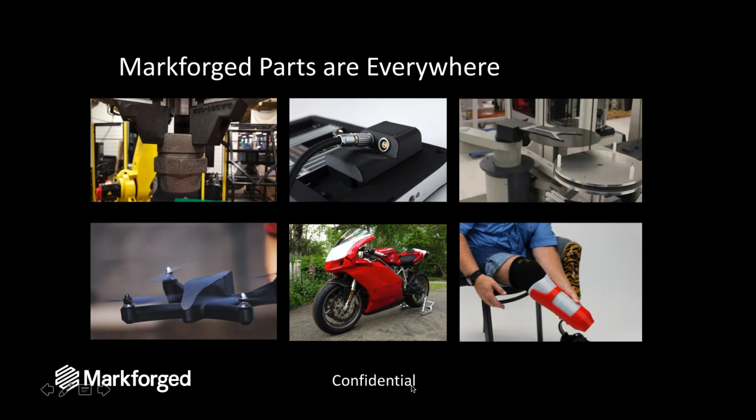All right. Okay, great. So thank you, Cynthia.

And so now we'll move on to sort of an overview of design for manufacturing. So in general, in sort of a design workflow, whether you're an engineer or a designer, the usual process: you come up with that idea, you model it in your CAD program, you draw it up, then you go to your manufacturing and design process, and then you have your final product.

And this is sort of an ideal workflow that doesn't really have a lot of the hidden factors in designing for the manufacturing process and iterating upon your ideas. So in reality, there's this sort of feedback loop: you come up with your idea, you start to sketch it out, you start to draw it, you start to model it, and then there's this cycle of iteration and improvement in which you're designing to improve your manufacturing process, to improve the functionality of your product.

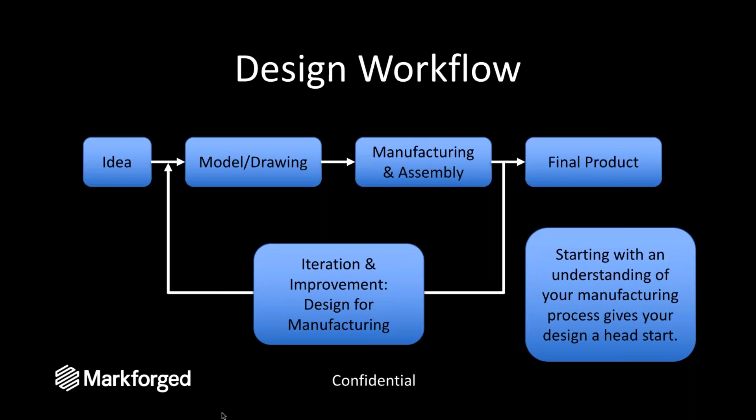And what a lot of engineers and designers do is start with a rough model before deciding upon a manufacturing process. And through iteration and improvement, V2 is always going to be a little bit better designed for a specific manufacturing process than V1. And every step of the way, there's always room to improve the design of a model, because there's always ways to make the manufacturing of that part easier. Whether it's a CNC machine, a 3D printer, a laser cutter, design for manufacturing ensures essentially that you get reliable parts that can be produced easily.

So why design for manufacturing is important is, on the evaluation side, you can save a lot of money through implementing effective design for manufacturing. So a part that you machine on a mill, your first revision of it may take 5 hours to machine, but your second, because you were able to eliminate a tool holding change, could take 3 hours, and that saves manufacturing time, which saves cost, which increases efficiency and decreases time wasted. So in every manufacturing process, there's always ways to evaluate how to make your design more effective.

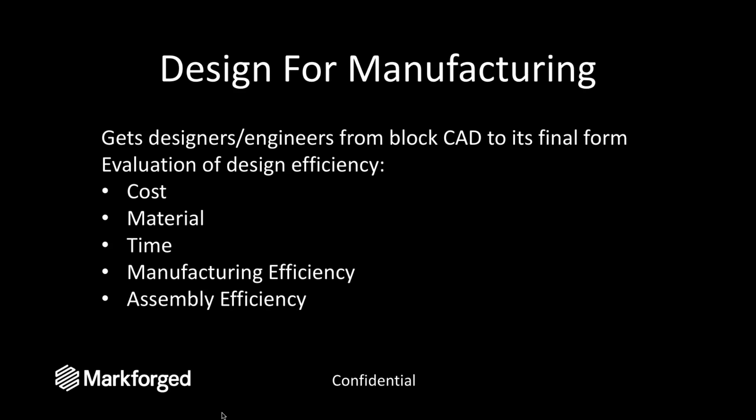One example that I always like to talk about is hand drills. The shell of the hand drill is this complex injection molded part, but the way that it's designed means that an entire hand drill, if you take like a DeWalt drill or something like that, can actually be assembled in under 2 minutes. So the part is very well designed for assembly, because they want to produce thousands of these a day. So everywhere in the design process, you can really increase your productivity and design efficiency by critically considering your manufacturing process and what its benefits and drawbacks are.

So for example, we start with a block rough CAD model of an enclosure on the left here. This enclosure, depending upon what manufacturing process you decide, can be optimized to suit the efficiencies of that manufacturing system. So for example, on the bottom, if it were to be laser cut, you'd have to split it up into a bunch of flat pieces that you would then glue together or bolt together and use maybe standoffs or spacers to get the threads where you need them to be.

And this would be very different from 3D printing that part, which would probably take longer than laser cutting to manufacture, but give you a higher quality, more final looking model. You'd need to have heat set inserts for the threads that you see in the model, and you would design it to have a little bit more natural and curved aesthetic.

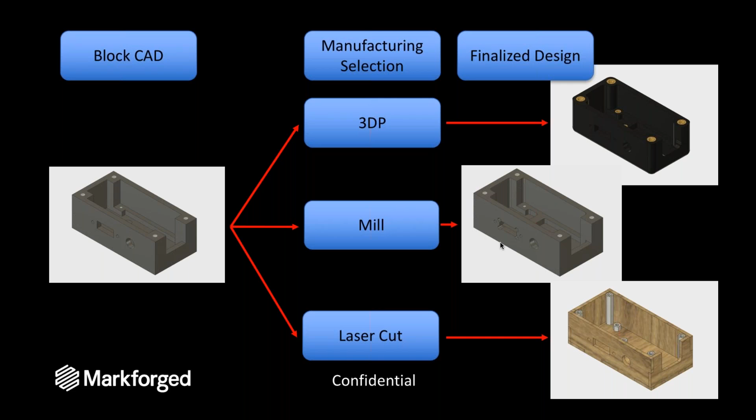Whereas if it were machined, you'd probably have to do some amount of design work to optimize for what type of bits you're using, what stock you're cutting from, how you plan to hold that stock, and how you plan to deal with things like if you need a sharp corner when you're machining something, how you go about doing that because the bit is often round. So every process requires this step of making sure that you can actually manufacture it given the manufacturing process you've selected.

A lot of the way that 3D printing is portrayed is as this tool that can create anything. And our thoughts on that are that 3D printing is just like any other manufacturing process. It has some really amazing benefits, especially with our printers. You get parts that are nearly as strong as metal. You get parts that are very precise, very high quality surface finish. But designing with the process in mind is still a really, really important step because it will guarantee quality and reliability in the parts that you're printing.

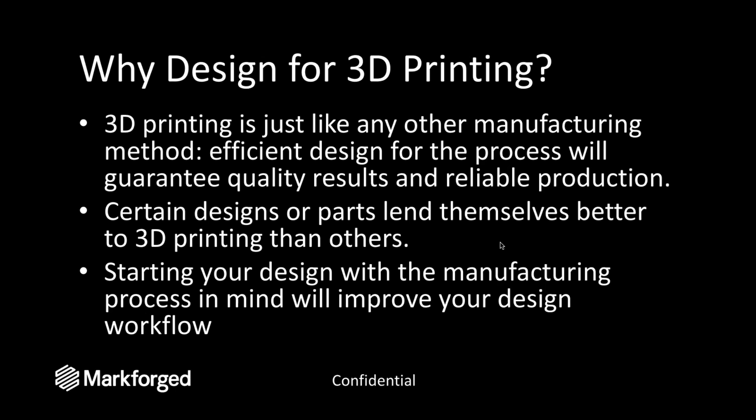So if you start your design with the idea that you're going to be 3D printing it or you're going to be making it out of sheet metal, that will be able to improve your design workflow. And in order to do that effectively, have a good understanding of what the limitations and what the pros and cons are of the 3D printing process as a whole. So we're going to go through some of those pretty quickly just so that you have an understanding of where 3D printing can be really valuable and where other manufacturing processes may be better.

So in terms of our type of 3D printing, FFF 3D printing, so fused filament fabrication, the process is layer by layer. So you're laying down sort of beads of material on a build plate, building that up layer by layer. So where the design for manufacturing for 3D printing on any sort of FFF 3D printer comes into play is in the geometry limitations of this process.

So that includes the support and overhang angles. That's based on material. That's based on sort of how supports are generated. The z-axis strength of the material itself. So how can you orient your part to be stronger, to be strong where you need it to be strong?

3D printing in general is a relatively slow process compared to things like laser cutting, but ends up being much faster when it comes to things like using a service provider to order CNC machined parts from. So a lot of these specifications are dependent upon the printer, but in general, the additive layer by layer process has geometry limitations.

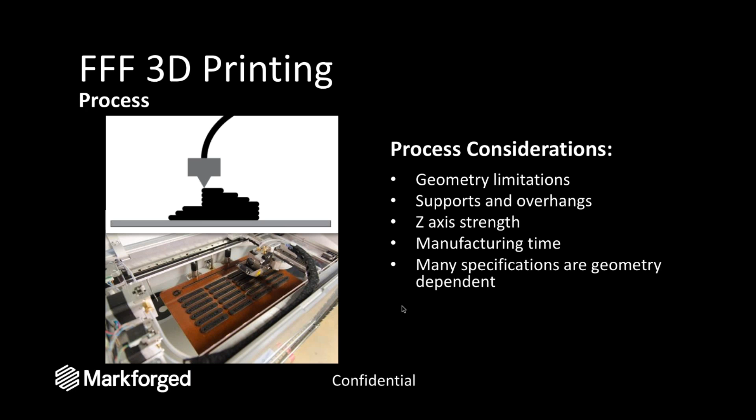And so you can optimize for that, you can control how much fiber you're putting into your parts, and so that's what makes our printer stand out. The part strength ends up being comparable to metal because we're able to lay down continuous strands of fiber inside of our parts. Some of the considerations are, because the fiber is being put down inside of parts, small feature reinforcement has its limits, just like the small feature capability of any sort of 3D printer.

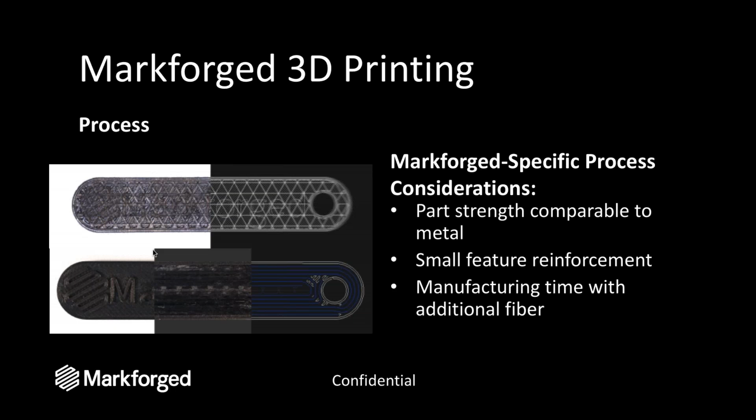So one of the big geometry considerations of 3D printing in general is the minimum wall thickness and detail that printers can hit. So on our printers, we can hit about 1.6 millimeter wall thickness; that's the thinnest feature we recommend including in designs. So basically why that is, each strand of filament is 0.4 millimeters thick. So when you get down to really, really small wall thicknesses, you want to have at least 4 walls. So that means at least 4 strands of filament.

For detail features like engravings and embossings on your parts, the filament can sort of extrude outwards and then come back into the part. And so we generally suggest 0.8 millimeter thickness for details that are on the faces of different parts.

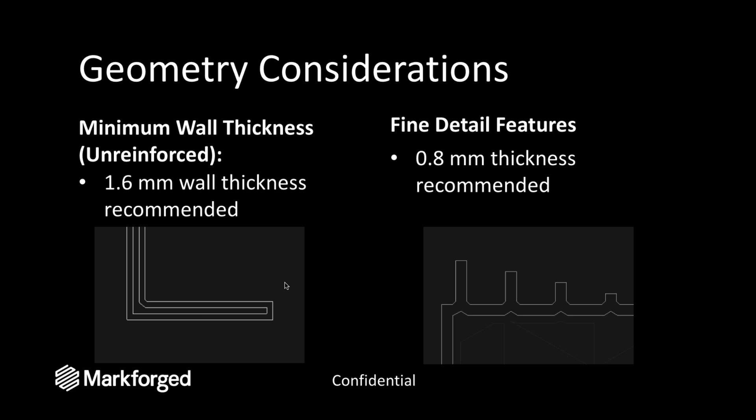These screenshots are all from our Eiger software. It's how we slice our parts for printing. So you have control over infill settings, the slicing settings, etc. And then you also can control on a layer by layer basis how fiber is reinforcing your part, and we have settings that we optimize for that.

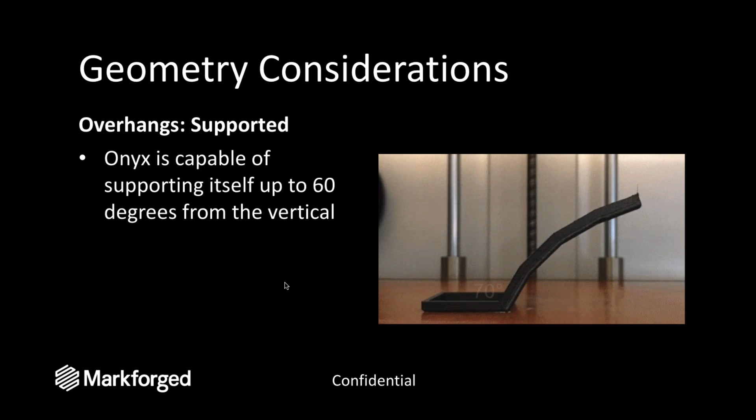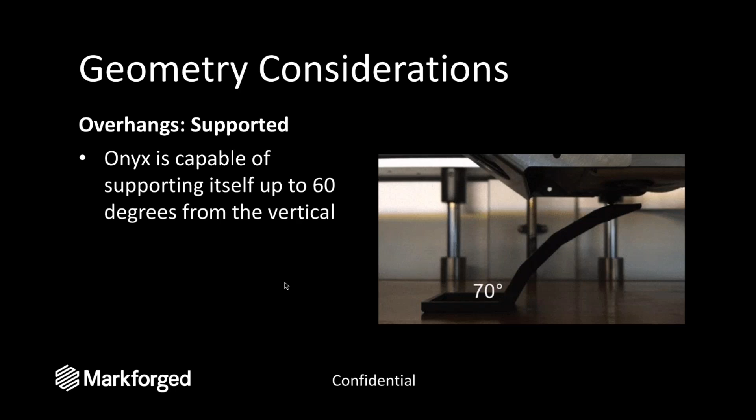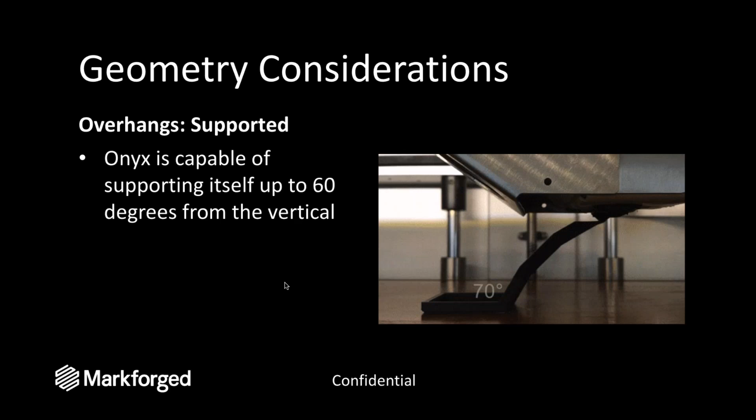So in general, overhangs are another big design consideration in 3D printing. Our Onyx material is capable of supporting itself up to 60 degrees from the vertical. So our supports usually kick in at around 45 degrees, but usually we're able to do a little bit more than that. The overhangs end up being really important because if you want to cut down on material usage and print time, then you can use the overhang angle to your advantage when you're designing to remove support materials, and I'll talk a little bit about that later.

In terms of the minimum detail feature size, vertical posts and minimum hole diameters are another key consideration. So we recommend about a 2 millimeter diameter minimum post size. This is for a similar reason as I explained before with the minimum wall thickness, where you need a certain amount of rings of filament being laid down to create the part. And for hole diameters, we suggest no smaller than 1 millimeter because the hole will essentially end up closing if it gets much smaller than that.

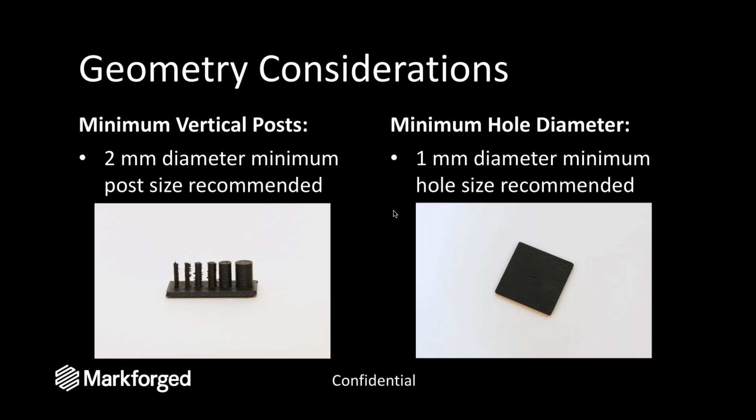A lot of these are very common to many FFF 3D printing processes because we're working with thermoplastics, and thermoplastics have their own set of requirements when it comes to how they behave when extruded.

Now we get on to the fiber reinforcement aspect of our printers. As we described earlier, our printing process has 2 nozzles. One of them extrudes the plastic, which I've talked about up until now. The other one lays down continuous strands of fiber inside of your part. So the fiber is always going to be reinforcing on the inside. Because it's being placed inside the walls of your part and you have some control over that on a layer by layer basis, it's always going to be trying to find a loop in your part.

So our general reinforced wall thickness minimum is 3.8 millimeters. There are exceptions to that. For example, on the right here, we're able to fit one strand of fiber inside of this loop extrusion because it can loop back in with the rest of the part. So if the feature is able to form a loop, then you can create a 2.9 millimeter wall. If not, then stick with 3.8 millimeters, and that will guarantee that fiber is able to fit into your part.

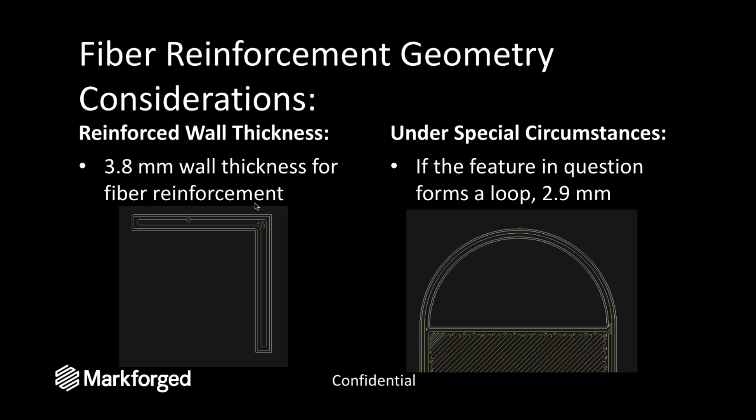An additional fiber consideration is that because we're laying down fiber inside of the parts, the fiber has a minimum required length. It has to be 45 millimeters or longer to be able to fit inside of your part. And so that means that for very, very small features, fiber may not be able to fit. And that's a big consideration in our printers.

A lot of our customers use our printers for things like tooling and fixtures, prosthetics, and equipment. And they're often printing these larger parts. And so the geometries that you can reinforce can only go so small because the fiber is continuous. So we need to be able to specify a length of strand that can fit into the part for it to work well.

In every layer of fiber, when you lay down a layer of fiber, the software creates roofs and floors over that layer. You can stack multiple layers of fiber on top of each other, but if you just had one layer of fiber, the minimum thickness of a part reinforced with fiber would require a certain number of floors and a certain number of ceilings on the top and bottom of that layer. So it's essentially a 9-layer minimum. With fiberglass, that creates a 0.9 millimeter minimum height. With carbon fiber, that's 1.125 because it's a little bit thicker.

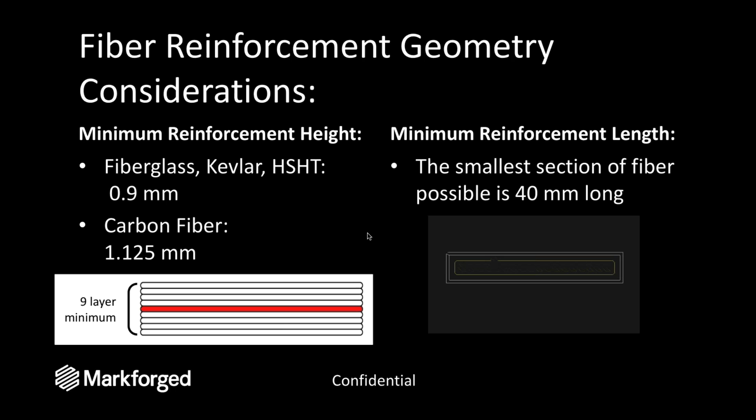And so as you increase, you can just fit a lot more fiber in, and so the roofs and floors end up taking a fraction of a percentage of the total number of layers. But in very small, very tightly packed parts, these are sort of the minimum details that you can hit with fiber.

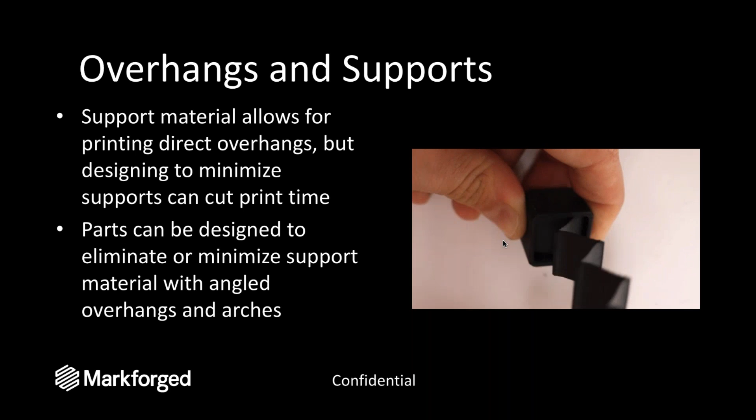Okay, so now we're going to go on to talking about overhangs and supports. So in general, our support material, as you can see here, you just sort of peel it out. It's this accordion-like structure that you can remove easily from the undersides of parts. It allows for printing direct overhangs, but designing to minimize supports is something that we often practice here because it allows you to cut down on print time, cut down on material usage, and that ends up saving a lot of time and saving a lot of money in some cases.

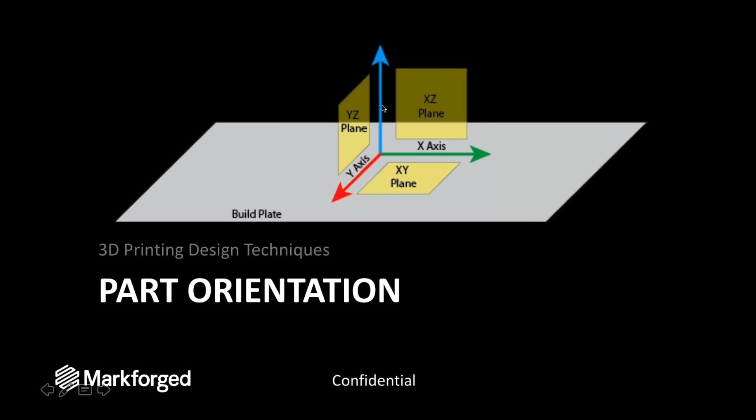This is how we consider our reference geometry, where the XY plane is parallel to the build plate. The XZ plane and YZ plane are perpendicular to that, and the Z-axis is normal to the build plate. So when you're loading along strands of fiber, where you're either trying to bend them or trying to pull them, that is where parts end up being strongest. This is both with normal plastic filament and also with fiber reinforcement, because that's where the fiber is really powerful. That's where the continuous strands are being loaded in the direction that they are meant to be loaded in. So the parts are strongest when the strength is parallel to the build plane.

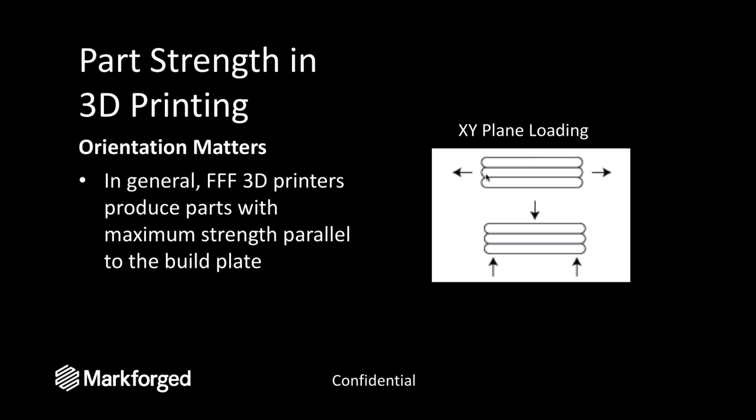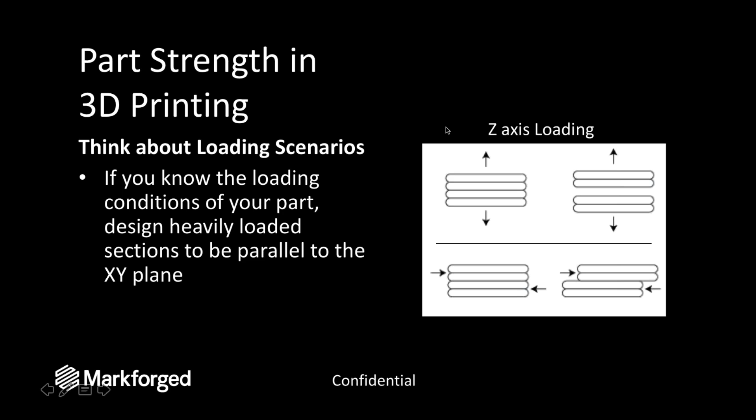If you know the loading conditions of your part, then you can design with that in mind. The Z-axis, on the other hand, in many 3D printers is what ends up being the weakest direction, because the layer adhesion is often going to be weaker than the tensile strength of the material itself. So it can often shear or pull apart. This is a drawback in many 3D printing processes, because you're always going to be building things up layer by layer. The Z-axis is going to be weaker than X and Y.

So with that in mind, designing with a build orientation in mind is a very powerful tool for designing parts for 3D printing effectively, because it allows you to reduce supports, reduce material, and reduce print time while optimizing your part for its necessary strength.

In terms of creating these types of parts and joining them together, as I discussed before, we have a lot of resources for that on our blog, and we'll continue to produce that. But when you're thinking about part geometries in 3D printing, really thinking about how your part's going to be loaded before hitting print can save you a lot of hassle, because there are always ways to make the design more efficient and more effective.

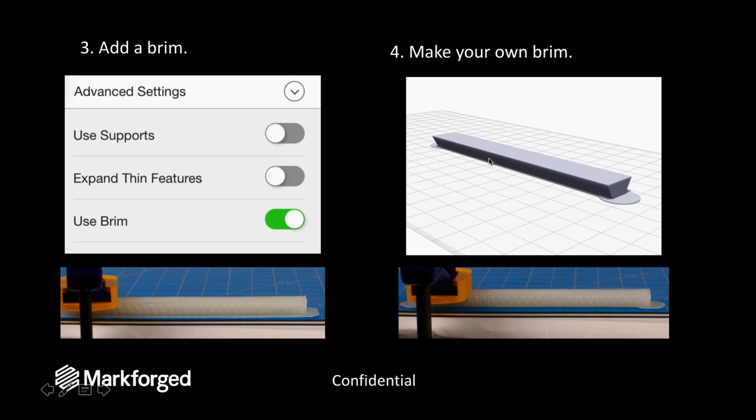In special circumstances where the brim may not be enough, or the brim may not have the geometry that you need to prevent the warping, you can make your own brim. So instead of adding a brim all around the part, I know that the warping just occurs at the ends here. So if I make larger cross-sectional faces that adhere to the build plate on either side of this part, then you can also reduce warping. So just by adding sort of these like Mickey Mouse ears to either side of the part, you can make your own brim and prevent warping.

So Onyx in general is very, very dimensionally stable. Onyx is a chopped carbon fiber nylon mixture. And essentially that micro carbon reinforcement, even though it's not continuous, means that the parts themselves are much more dimensionally stable and stay consistent instead of shrinking as much as other plastics like PLA, ABS, or things like that do. So I've had nearly no problems of warping with Onyx just because it's a very dimensionally stable material.

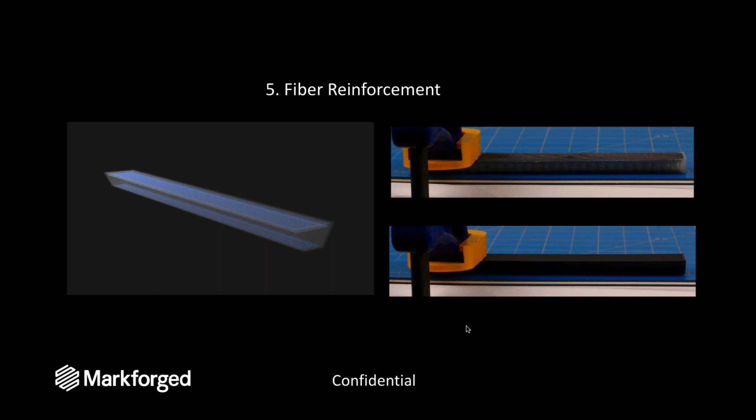So the next thing that we're going to talk about is tolerancing and unit tests. This is perhaps the most important lesson that I've sort of learned when working with 3D printing, because tolerancing in general for different types of machines is tricky. All manufacturing methods, and even down to specific individual machines, whether it's, if I have a CNC machine and someone at a different company has the same CNC machine, just because of even just the wear and tear on the machine, or what kinds of materials they're making on it. All manufacturing methods have their own tolerance specifications.

So 3D printing tolerances usually arise from gantry robustness, motor precision, and dimensional stability of the materials. So you may have noticed that on our printers we have a very robust, sturdy aluminum frame. With Onyx, our primary material, it's very dimensionally stable, as I just discussed, and we have high-quality stepper motors that control our gantry. So that means that we can usually achieve about 50 micron precision in a part.

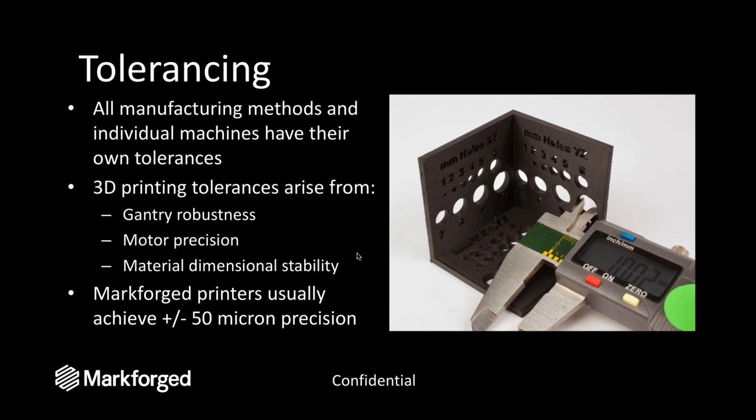So in tolerancing, especially if you're printing parts that are going to interface with other components, whether they're printed or not printed, tolerancing is really important, because you don't want to have to print a 16-hour print and then realize that it's wrong. So that's why we heavily suggest using what we call unit tests, where you're testing the specific fit of an interface without having to print the entire part.

So this part over here was designed by Daniel. It's the sort of lens hood for a camera. One of the very important features was making sure that that hood actually snapped onto the camera lens that he was using, and that fit was correct.

So the part itself takes about 4.5 hours, but he was able to test just the ring of that part, which was a 15-minute print, to ensure that the 4.5-hour one succeeded.

So unit tests end up being really important exactly for this reason, because especially in manufacturing, where expediency is key and hitting the right tolerances is key, you want to be able to make sure that the way that you've designed your part will work in context. So you can ensure that large prints will come out the way you want them.

When I first started 3D printing, I'd design a part, I'd print it out, I'd get really excited, put it on whatever machine I was making, and then realize that all of the holes were a little bit too small, or a sliding fit that I wanted to work didn't quite work. So by printing out very small sections of each part of the model, I was able to test the dimensions on each of those to ensure that they would work before I went out printing a 16-hour print.

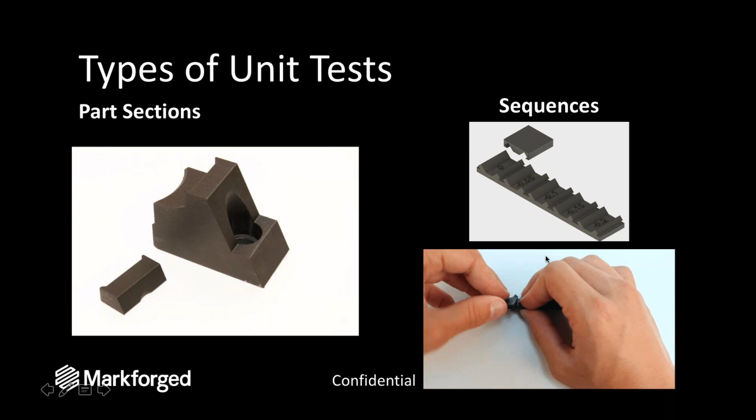So that allows me to test such that when I print a geometry like this as part of a larger contextual assembly, I know exactly what tolerance I need to hit and what dimensions I need to use to get this sliding fit. So it turned out that the 0.05 millimeter tolerance gave me a tight, close fit for the slide, which is what I was looking for.

So in terms of designing a unit test, it's all about identifying what sections of your part you actually need to test. So here we have this gripper for this pipe coupling. The gripper needs to grip the part in a specific orientation. So it has this feature on here that essentially wraps around this hexagonal part.

So in your CAD program, just by spending 10-15 minutes either isolating that specific section of the part or remodeling the section in question to produce a very small little part that you can test can really do a lot. So again, as I said, there's either a sequence or just isolating that component.

So you can either create this component, test it out with different offsets and different geometries on the faces, or you can just print one to make sure it works and tinker with the geometry until you get the fit that you want. So print the test piece in the orientation that the final model will be printed in, and then you can test it on your final model.

So here's just the small unit test. This took about 15 minutes to print. It fits on the coupling that I need it to fit on, and so now I can go ahead and print the rest of my jaws, and I know for sure that they're going to fit the way that I need to.

So unit tests can be really, really valuable because of this, especially when you're working with fiber reinforced parts that can end up being a little bit more expensive. The parts themselves could take a day to print, and you can print out this 15-minute part that ensures that that day-long print is going to succeed, and it only takes about 15 more minutes of design time.

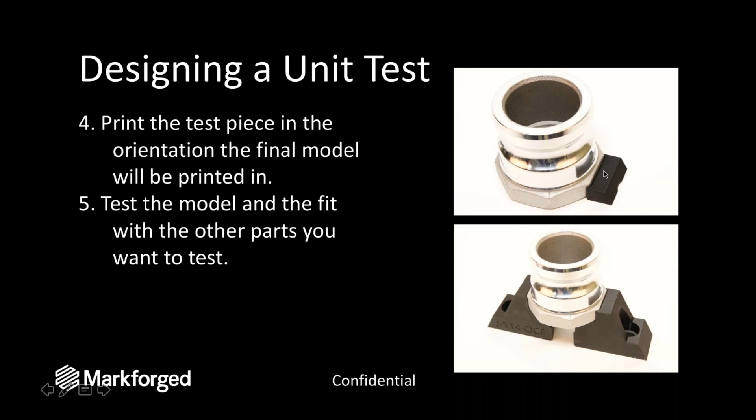So in general, the main takeaways: 3D printing, especially with Markforged printers, where we can print things like tooling and fixtures, we can print strong parts. It enables large time and cost savings because you can print parts overnight that may take a few days, few weeks to machine. And designing for that process enables strong, precise, and production quality parts.

So when you're designing parts with our process, consider the limitations of the manufacturing process, whether you're machining, whether you're laser cutting, whatever, and what process would be best for your design. In some cases, you may realize that a lot of the features of your part are very planar, and it may actually be easier, at least on a prototyping side, to laser cut that part.

Whereas, you may have some complex geometries that would be very, very prohibitively expensive to machine that you could 3D print with our printer and have them be just as strong and an order of magnitude less expensive than if you were to machine them. Always remember to design with a build orientation in mind.

So consider, as you're starting your design for the part that you want to print, where it's going to be printing from, and use that to guide where there are overhangs, where support material may be used, step by step through your design process. And then use unit tests to reduce material waste, manufacturing time, and cost.

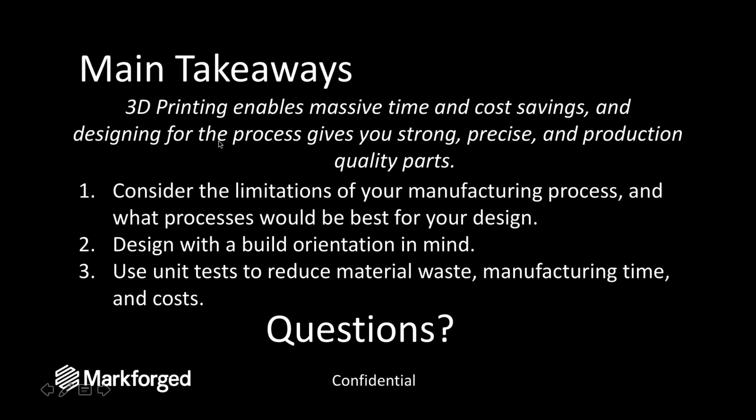There's a question with regard to print time. So, for example, a part like this was, I believe, a 5-hour print. If you were to reinforce this with fiber, it depends on how you're reinforcing it. You could just do a sandwich panel reinforcement, or you could reinforce the entire thing. If you're just reinforcing where you need to, which in this case would probably be a sandwich panel with concentric fill, then that could take maybe 7 or 8 hours.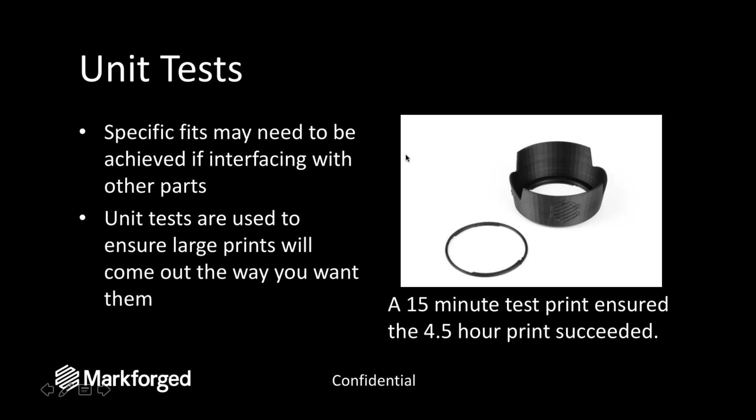If you're reinforcing the entire thing because you want it to be really, really solid, really robust, that could take like 12 or 13 hours. And so we advise being smart with your reinforcement techniques, which we had a webinar on last month, and if you're interested in seeing that webinar, you can ask for that as well. For some of the smaller parts, so this part, I believe in total, took like 12 hours to print with that fiberglass reinforcement.

What is the general speed of 3D printing with respect to machining on a milling machine? So in general, this is a tricky question to answer because 3D printing is a hands-off process. You hit print, you let it be, and then you come back the next morning or later in the day and your part is printed. Machining is very hands-on, where you have to either manually machine that part or watch over the CNC machine while it's machining, and that ends up being much more labor-intensive.

So time-wise with 3D printing, what matters is the cross-sectional area of the part, whereas CNC machining is more about the number of operations that are needed. So a very complex part like this would be prohibitively expensive to machine, especially if you want it out of a stronger material, because there's a lot of different operations involved, and you need to use a 5-axis CNC machine to get some of these contours. 3D printing it only takes 12 hours.

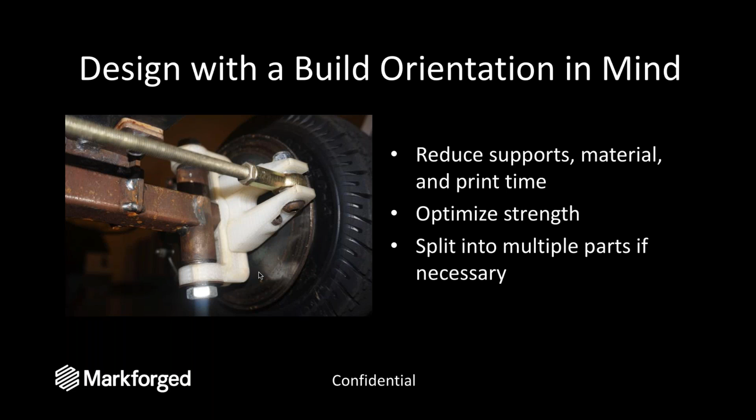The jaws would take about 2 or 3 weeks to machine and cost about $900 a piece. With our printer, they're able to print a single jaw in 6 hours for about $10. So the time and the cost that they're saving is very, very substantial, because they didn't have the machining resources in-house that they could spare for machining new sets of jaws.

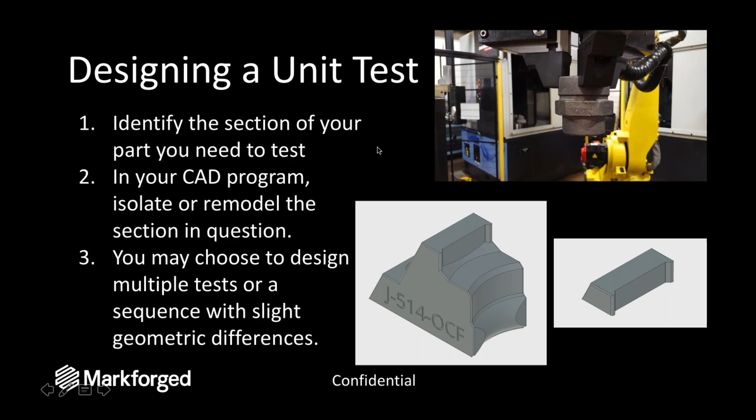There are some questions about adhering parts, which I did mention. There are a few different ways if you want to print parts that are larger than the build plate or have multiple different aspects to them. We have a few different methods. The first one is using Loctite. Loctite 401 is a very stiff Loctite that is really useful for both our nylon and our onyx that we use to bond parts together.

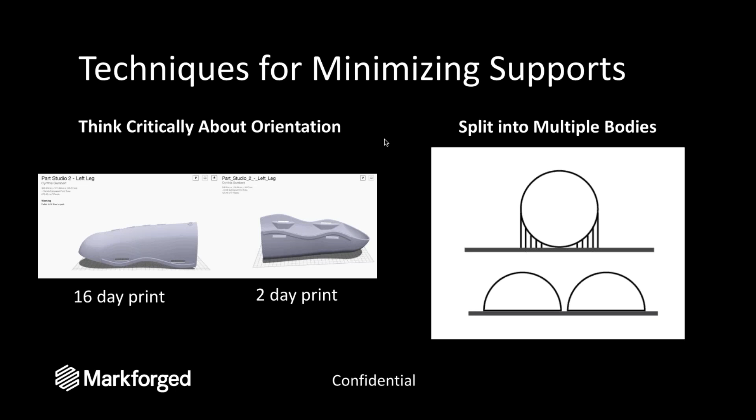There was a question about designing removable supports. So basically what our supports do now is they have this sort of accordion structure. In our Eiger software, you can control at what angle those parallel accordion structures are with respect to the x-axis. So for example, right now on this part, it's all parallel to this whole face.

If I wanted it to be perpendicular, I could set that support angle to be 90, and that changes the removal process. So here it's really easy because it's like an accordion. You can change the way the supports are oriented if you think they'll be easier to remove with that sort of process.

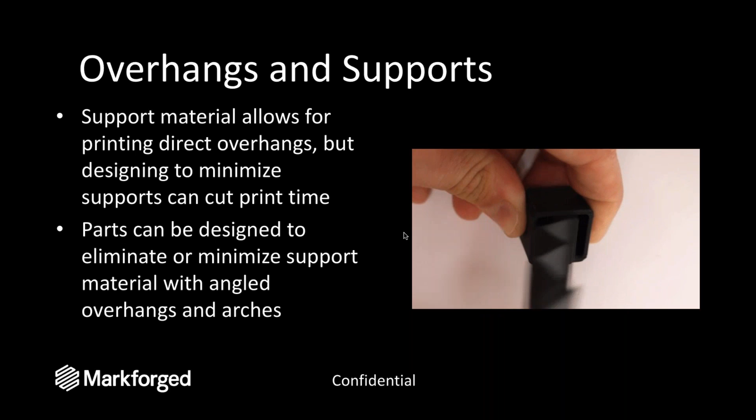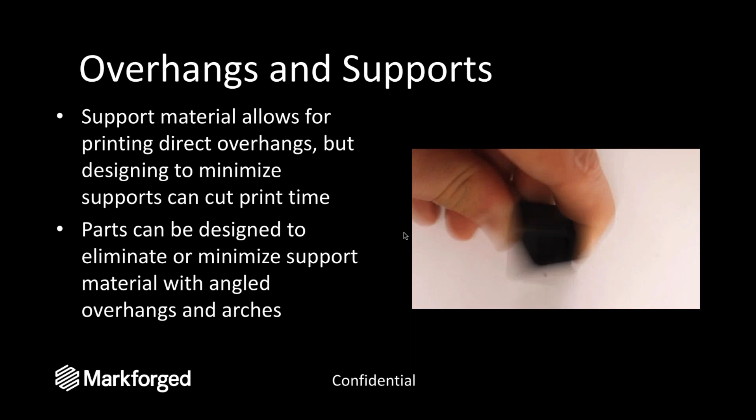Let's see. What is the temperature range for a part built with onyx? All of the specifications on our materials, both our plastics, nylon and onyx, and our fibers, so that's carbon fiber, Kevlar, fiberglass, and high strength, high temperature glass, are available on our material data sheet online.

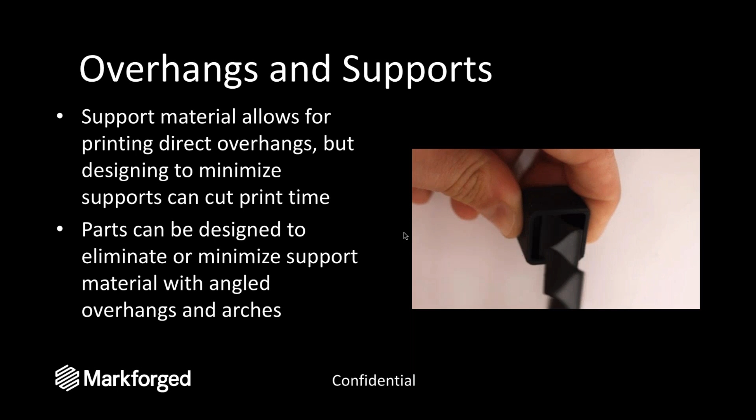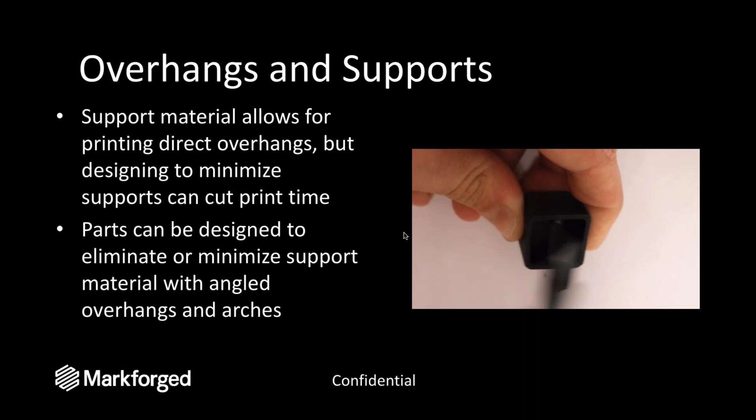The heat deflection temperature is 145 degrees Celsius. And we have a specialty high strength, high temperature fiberglass that boosts the heat deflection temperature to, I think, around 150 or 160. All of the specifications of our machines are available on our data sheet.